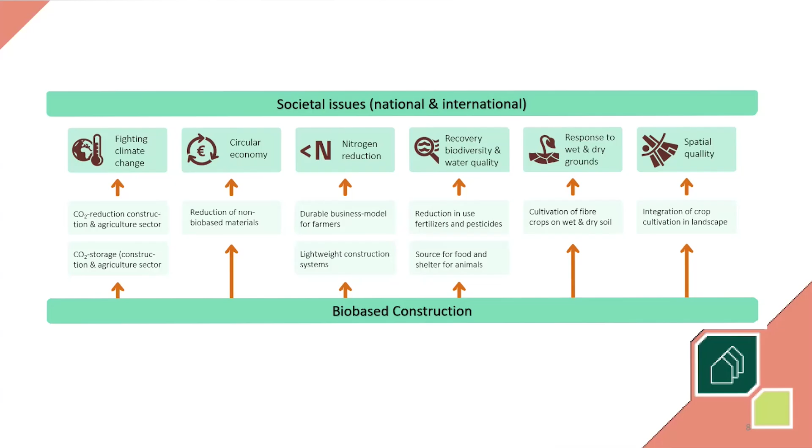because we have all kinds of layers in the Netherlands that when you reduce the groundwater average, then there's a lot of CO2 coming out. And with these crops like reed or whatever, you can raise this groundwater. And also spatial quality. So there's a lot of aspects that we can contribute to in societal issues with bio-based construction. But that's as a starter.

I was already introduced, but I'll introduce myself as well a little bit. I am an architect since 1997. I worked as an employed architect with several architecting organizations, and I made a lot of social housing. And apart from that, I also did something with utilitarian projects, mostly hospitals. I like that also very much.

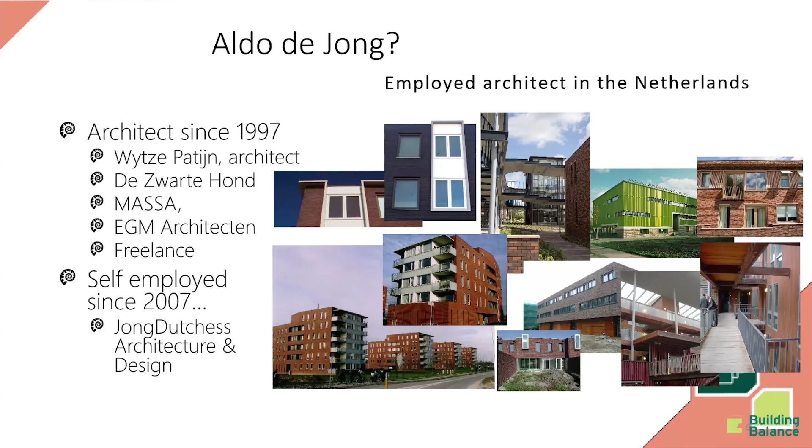So I started for myself in 2007. I thought I can do that on my own. But then in 2008, you can remember there was a big financial crisis. And in the Netherlands, 30% of all the architecture offices were gone. And I was one of them. But I lasted until 2010. And then I was employed at SBR, which is the Foundation for Building Research.

And since 2017, I am self-employed in knowledge dissemination and knowledge development for the building sector. And I'm teaching and consulting on building technology, building physics, and building regulations. And I do that for different organizations like ISSO, which is a foundation for building systems and constructions, and they also have different publications on building in general and also validated details.

I do that for BRIS, all different kinds of organizations, the Ministry of Housing. I lecture at the Brandpreventie Academy, and several certifying institutions and more. And last, I'm secretary of an advisory committee on building regulations, and we call it equally safe measures. So you can deviate from what's in the regulations, and you can do it in another way, as long as it is equally safe or good.

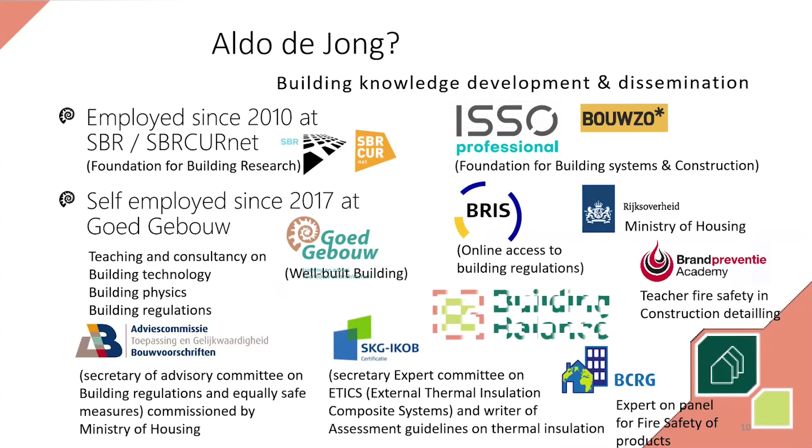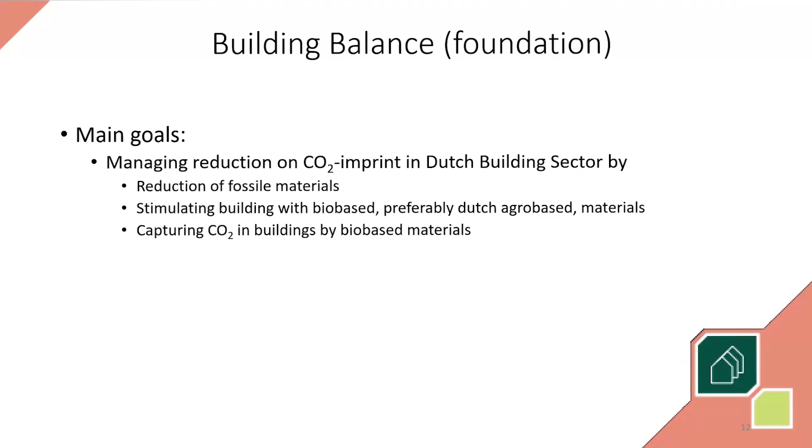And we are capturing CO2 in buildings by bio-based materials. And I use the word bio-based, but I have noticed that you use the term biogenic. Yeah, in my opinion, it's the same. I'm used to the term bio-based, so if you don't mind, I still use this term.

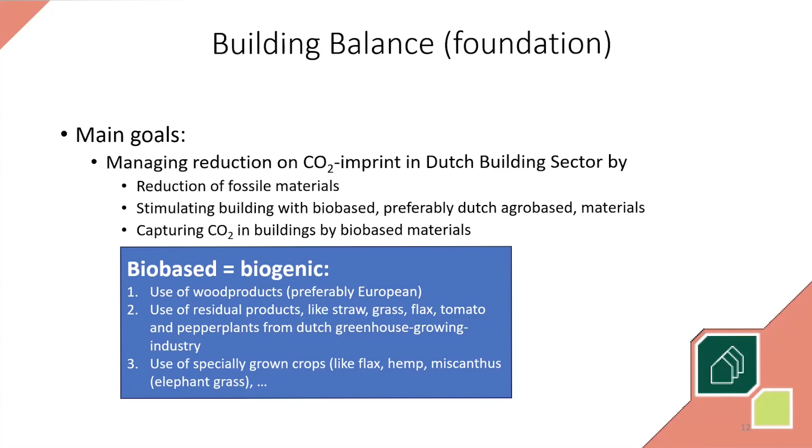Now all these goals and the whole approach is put into the national approach to bio-based construction. This was at the end of 2023. This was the start of Building Balance.

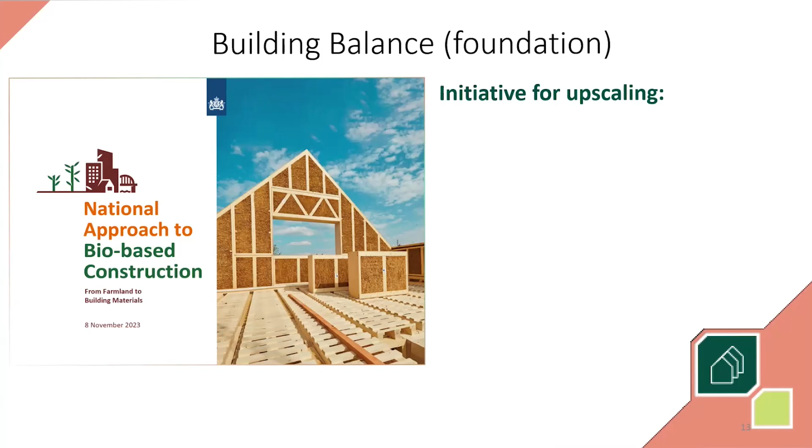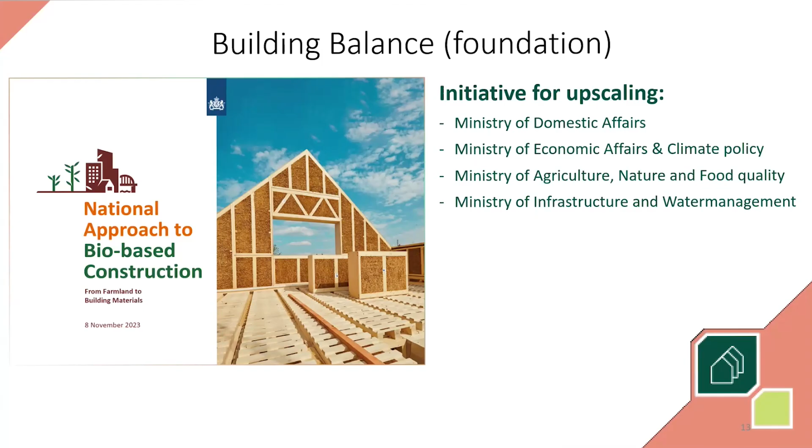We had an initiative for upscaling. That was the main goal, and it was supported financially, mostly by 4 different ministries. So the Ministry of Domestic Affairs, the Ministry of Economic Affairs and Climate Policy, the Ministry of Agriculture, Nature and Food Quality, and the Ministry of Infrastructure and Water Management. All these 4 ministries thought it was important to reduce our CO2 emission in the building industry. And therefore, Building Balance was founded, and it will also disappear again in 2030.

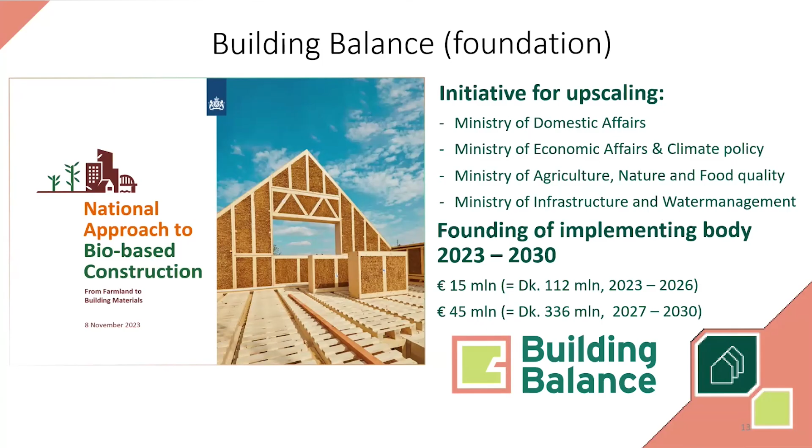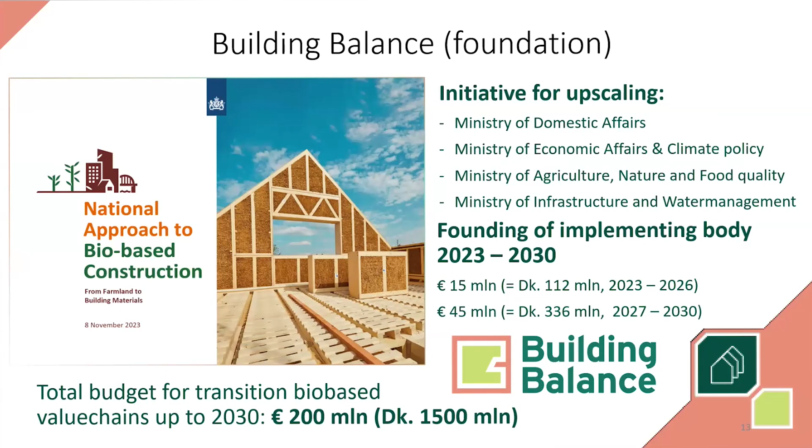And there's a lot of money involved. You see here the numbers. So that means that it's not all for Building Balance, but Building Balance can use a lot of this money. And so we can do a lot of research, and we can really do things to scale up the bio-based building. The total budget for transition of bio-based value chains up to 2030 is 200 million euros, which I calculated is about 1,500 million Danish crowns. So that's a lot of money.

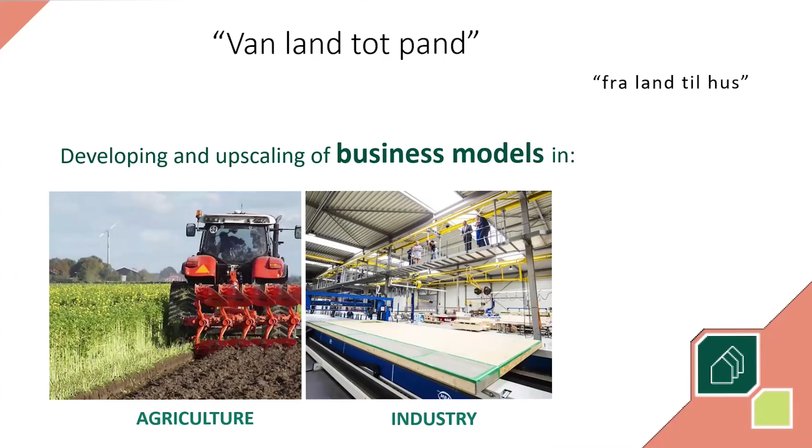How do we do that? We do that from van land tot pand. I translated that, it must be fra land til hus, or something like that. And we do that by developing and upscaling different business models. Business models in agriculture, so that's the agro-based side. In the industry, where we can process the agricultural products. But also, if it's not agricultural, but it's from wood, we can also make this industry scale up. And in the building sector.

And we are also developing and upscaling regional value chains. On the one side, we have agricultural production. On the other side, we have construction and infrastructure, and we want to bring that together. So we do that by processing all the agricultural products, make it into products and materials, and then use that for construction and infrastructure. And we try to do that all within a region, so the transporting is not so much. And what we see is also that it's nice if in your region everybody works together, has the same ambition to do it all bio-based. So we see that this works very well. These people are inspiring each other in regional value chains.

So the agricultural production, we are stimulating as Building Balance the agricultural production of crops, mostly fiber crops we use for insulation. We are stimulating factories, new factories, existing factories, for processing these fiber insulations and also for processing different kinds of fiber boards. We are stimulating product development for building and infrastructure, and we are stimulating different parties for supply and demand. So we bring together the supply and the demand.

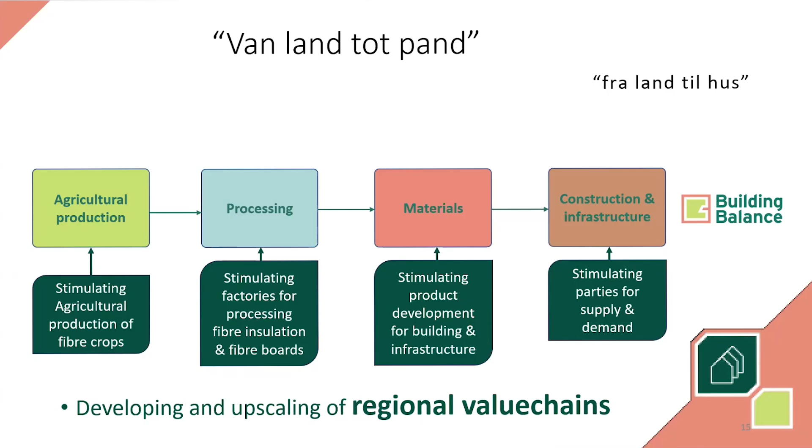You will ask, how will you do that? Well, we started with letters of intent and agreements. So we talk with people, inspire them, and then we let them sign an agreement that in the coming years, a lot of their production will be on a bio-based basis. We do that with farmers, with manufacturing companies, and also with architects, contractors, housing corporations, and property developers. They all have a certificate, and I've seen several architects where on the wall near the entrance, there's a big certificate: we are partner of Building Balance. So this works. So all this together is what Building Balance does. So it's the whole chain.

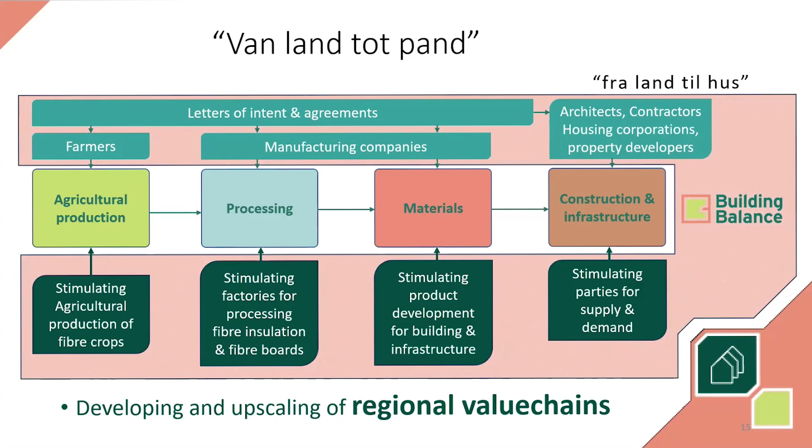Now, in these letters of intent, briefly, it says that by 2030, 30% of all your turnover or assignments will consist of bio-based products. And a product is considered bio-based if it consists of 30 mass% of renewable materials. There's also been a discussion whether it should be volume percentage, but eventually it is mass percentage. And it's lightweight, so it's really difficult sometimes to reach this 30% because stone is a lot heavier than bio-based materials. So 30% is really more than it seems.

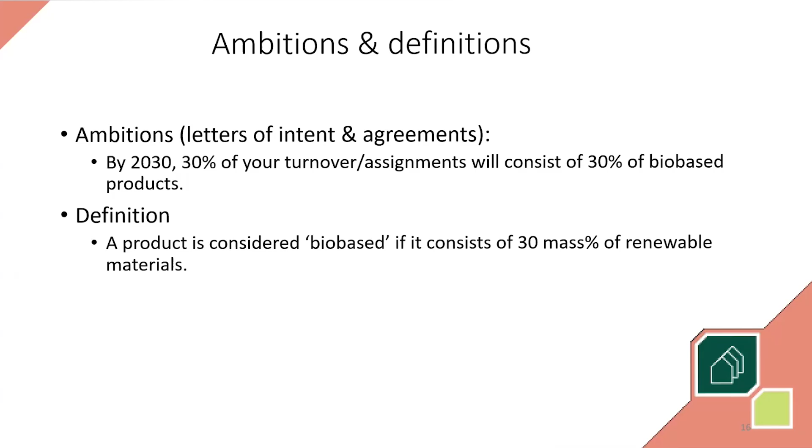Now, what do I do in this endeavor? I do a lot of things, and it's mainly focused on building the trust in the construction sector. So everybody has to trust that building with bio-based materials is a good thing, and it's not dangerous, and it's durable, sustainable, etc. But there's a lot of resistance.

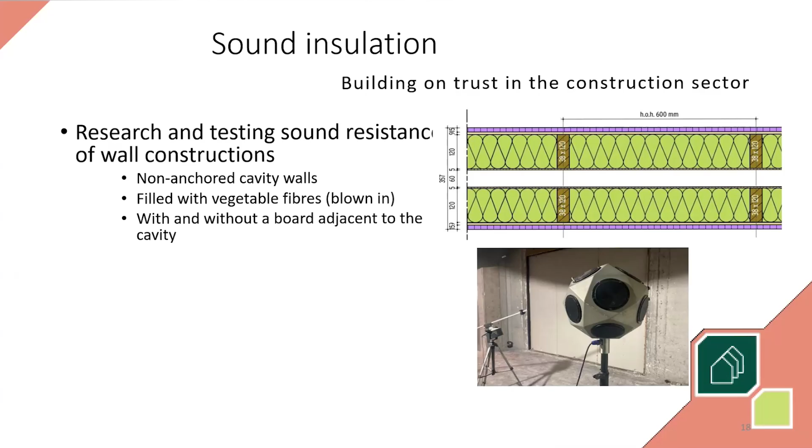So, for example, sound insulation: we research and test different walls that we never used in the Netherlands before. So we use these cavity walls between two houses, but never with blown-in vegetable fibers. It's 120 wide here, and we are used in the Netherlands to make everything as small as possible, so it's mostly 90, and here it's 120. And we have here a board on the cavity side. In the Netherlands we never use boards on the cavity side because that's not good for the sound resistance. But we did it, and we tested it, and it works if it's a flexible board.

Now, we researched, we tested a lot of these walls, but what we also did is testing different materials. And we test them on certain properties for the sound insulation, like airflow resistance, the rigidness, so how stiff is it, and we did it on different kinds of materials. And with those properties, we can design other structures that are not tested.

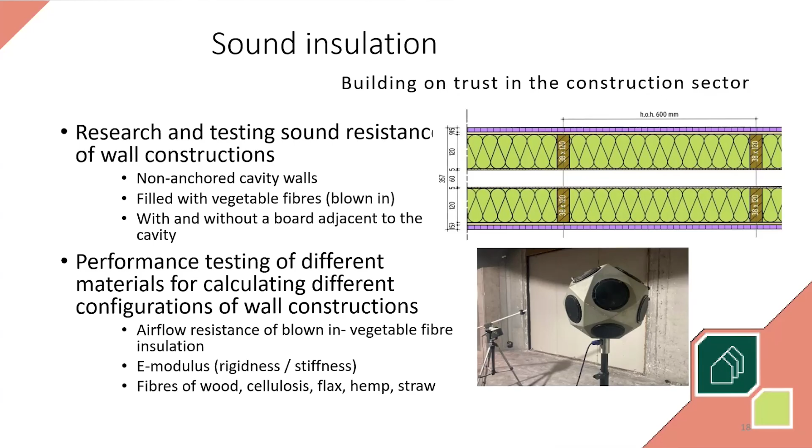So we use the test results of the tested walls in the software. We can use the other materials, and then we can take a good guess what will be the sound insulation of that wall. So then with some tests and with this small test, we can reach the sound insulation of a lot of different constructions. That was sound.

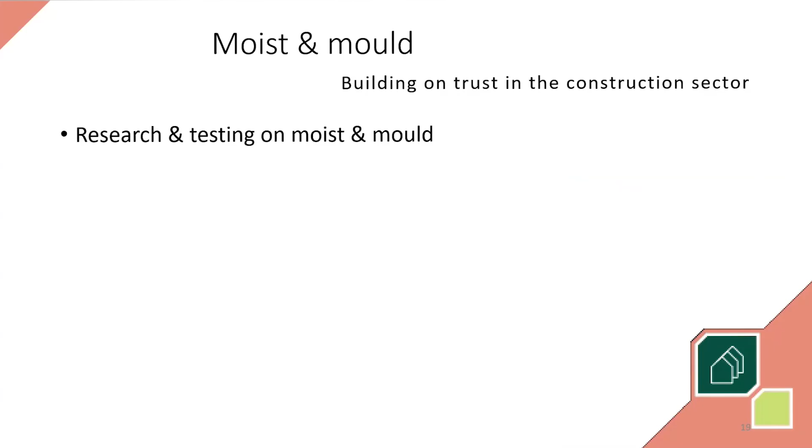Moist, oh, sorry. Moist and mold. We are also researching and testing on that, and we are determining the correlation between the relative humidity and the equilibrium moisture content. So you can understand that when you have a vegetable fiber, it's getting wet once the surrounding is wetter and wetter. So when it's 80% relative humidity, it will be more wet. But how wet can it be before it will grow mold on it? We don't know. So we're testing that.

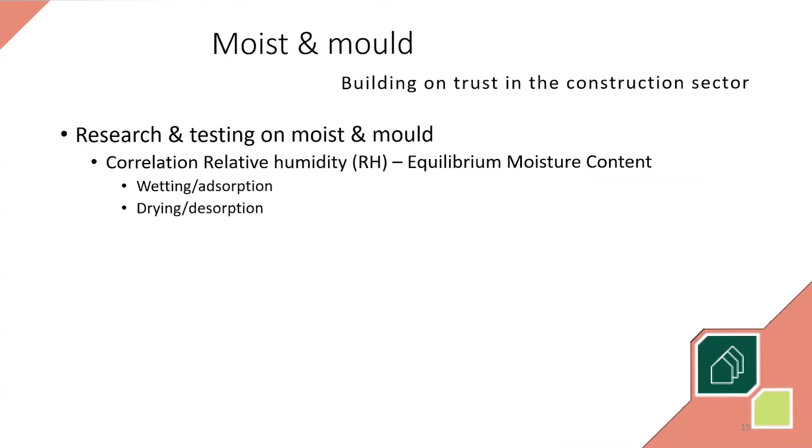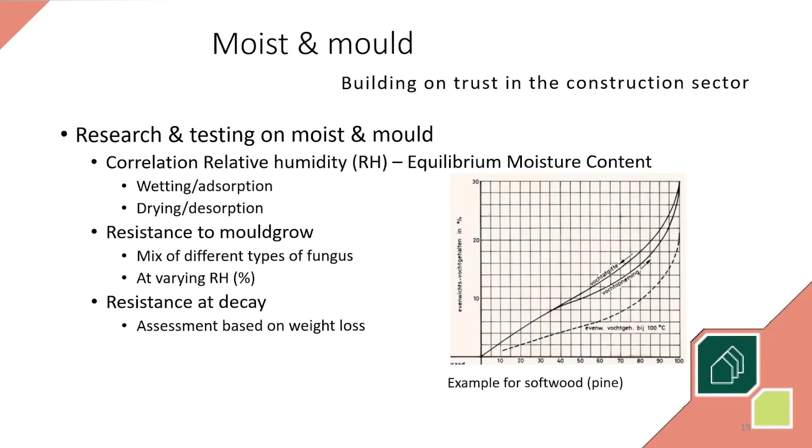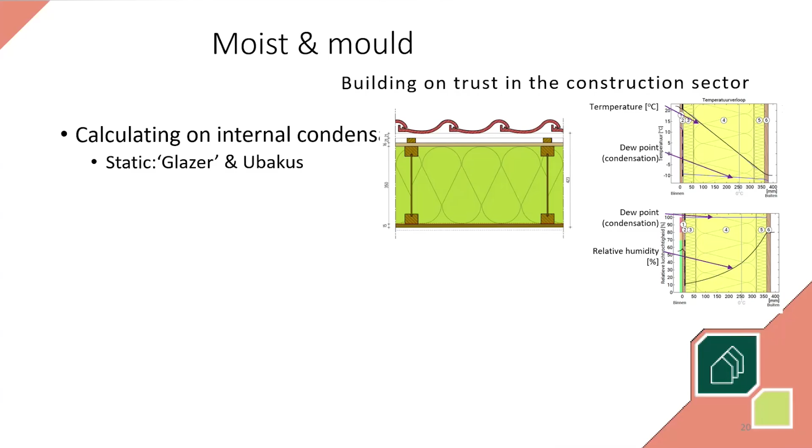And it works very good, but it only works when there's no internal condensation in the construction. But when there will be internal condensation, we think it's not so bad when it doesn't last too long, because it won't decay and there won't be mold growth. But we don't really know. And how long can it be wet before it dries? Then we have to go to a dynamic calculation, and we do that with WUFI Pro.

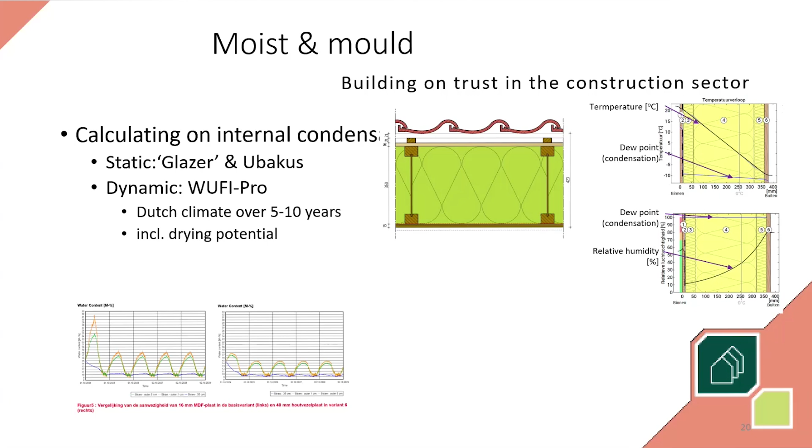WUFI is a software package of Fraunhofer Institute in Germany, and it's really the top of the bill package. And then you do it dynamically, so you take, in our case, the Dutch climate over 5 to 10 years, and you calculate on what weather in those past 10 years, for example, there will be internal condensation, and when it can dry out, and how long this wetting takes. Now that's on moist and mold.

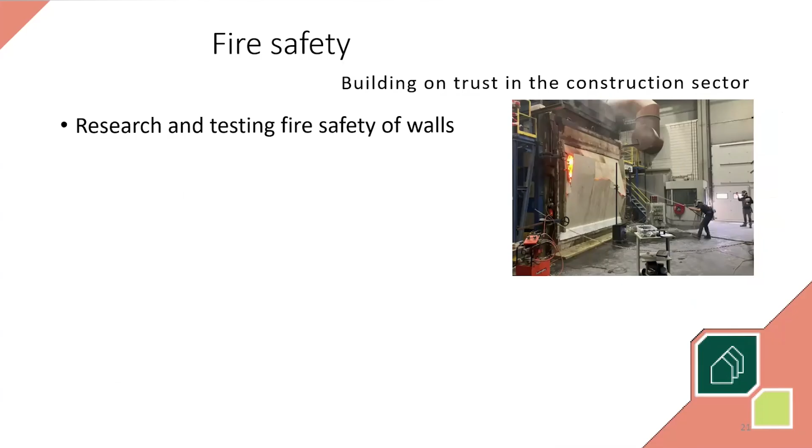And then fire safety. We're also doing a lot of research. We have done a lot of research. This is really finished for a great deal. Research and testing of fire safety of walls. I saw that you in Denmark do large-scale tests. This is the largest we can do here. So we are now upscaling in the Netherlands. We have 2 fire laboratories in the Netherlands. We are trying to get it bigger, but it's not so easy because the roof is too low. Yeah, I can't help it.

So we're researching all kinds of walls. This is an example of a load-bearing wall, and you see it in the moment that it fails. And we are also interpreting and interpolating the test results of those fire safety tests. And we do that with the help of some new documents, which are very interesting, namely the new design Eurocode 5. So that's the Eurocode on wood structures. And they have new definitions in it, like the charring time and the failure time of the fire protection system.

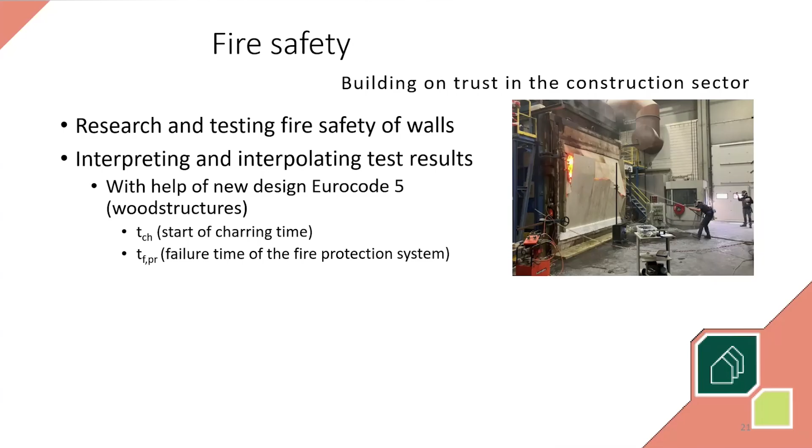The charring time is the time, after the ignition of the fire, when a vegetable fiber or an organic material behind a fireboard, like a gypsum board, for example, will start to char. And when you know that for different materials behind a protection layer, then you can switch all these materials into different constructions, and you can take a good guess how fire resistant that will be. There's also the failure time of the protection layer, so for the gypsum board, for example.

And we also have the protection level classification. That's also new, and here we have done tests on that. And the main thing of that is that the vegetable fiber insulation is in the same class, according to this new Eurocode, as glass wool. And we build a lot with glass wool. So how is this possible?

Well, glass melts at 700 degrees. A real fire, a developed fire, is at least 800 degrees. So the glass wool will be gone, as will the vegetable fiber. But we have a lot of constructions with glass wool, so that's something we can relate to. So we use this PL2 test also to switch between glass wool and vegetable fibers.

And we also have help of the newly introduced fire protection ability. I don't know if you have heard of that. It's all very technical, of course, but I think it's very important, because if you are going to use bio-based materials, then you have to know more and more of these properties that are valid. Because when you build with stone, nothing happens. When you build with stone wool, it's no problem. But now we build with materials that can burn. So you have to know more about these definitions.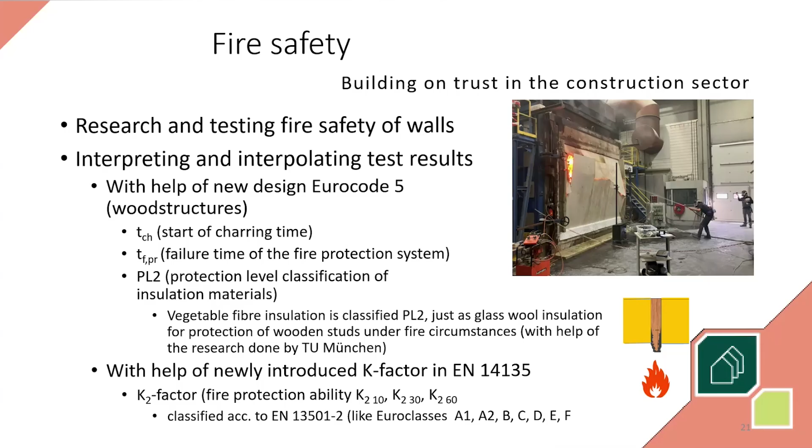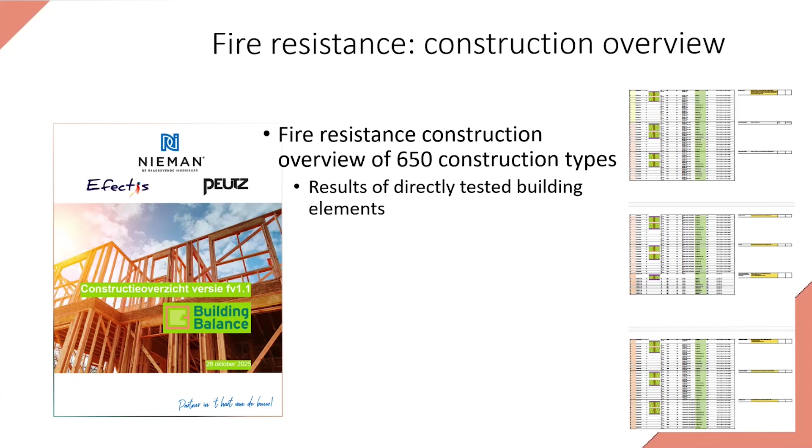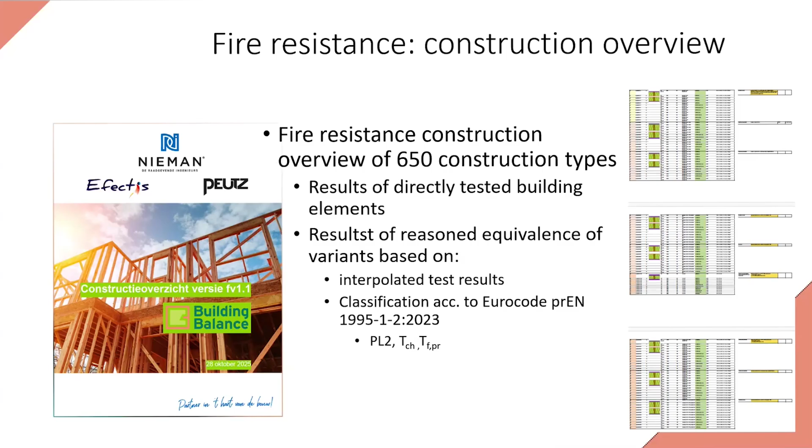So with all the tests and with these new definitions, we made a construction overview with 650 construction types. It was a real hell of a job. And this construction overview is all free. You can find it on nkbb.org. You find the results of the tests itself, and also the results of the equivalence of different variants based on the interpolated test results and on the classification according to the Eurocode with these definitions. It's too difficult to do this now in half an hour, but it's really mind-blowing.

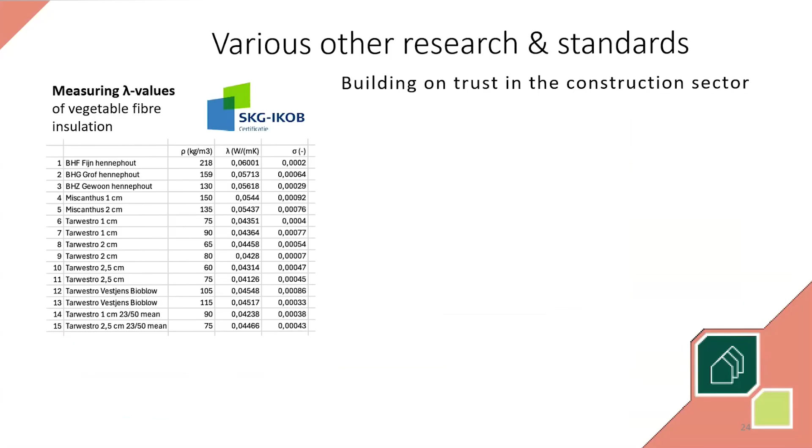We also do various other research. Just in short, we are measuring all kinds of lambda values for the insulation of vegetable fibers, because we had to use, we call it forfaitaire values, and they were not good. So we tried to certify all different kinds of vegetable fibers and their lambda values. We also did research on phase shift.

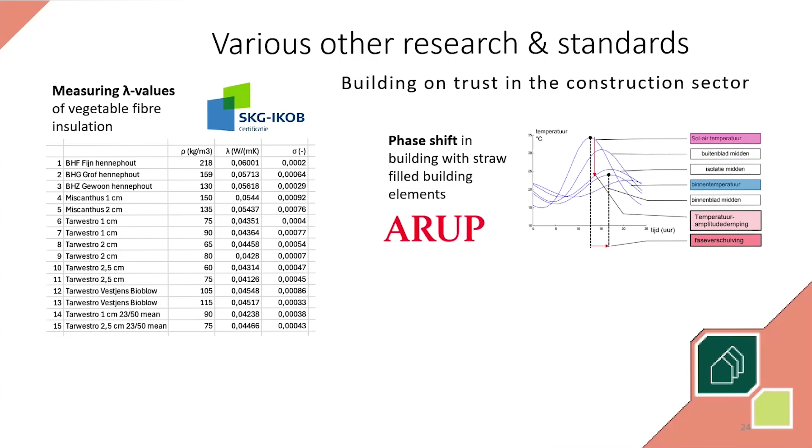Phase shift means that when the sun is shining and it's getting hot, then inside it's still cool; it takes some time before it's hot inside. You can put hours on how much time it takes. With stone, it's heavy, it takes a lot of time, and with light structures like bio-based materials, it's not that much as with stone. But it has a positive influence on how much energy you use.

And from end of May, the phase shift, based on the research we did, is now also in the Dutch building regulations. So we can profit now from the phase shift in our energy calculations. We also did research on plague animals in bio-based buildings. And the conclusion was that there's no difference between a building with glass wool and a bio-based building, because in glass wool there's no nutrition, and in the bio-based fiber there's also no nutrition, so there's no difference.

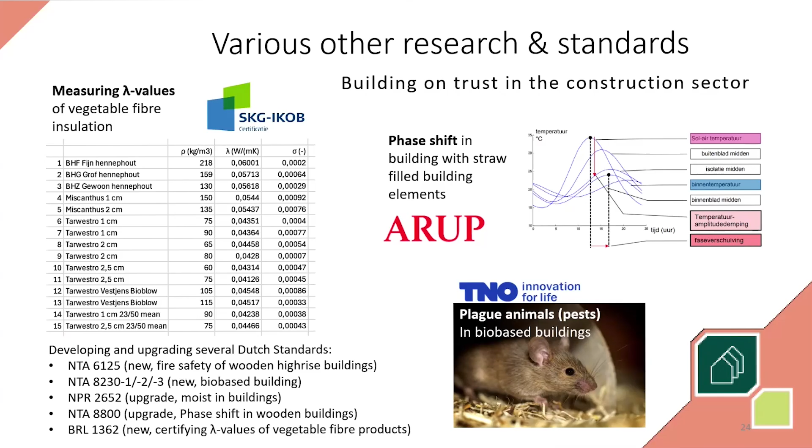And we're also developing several new standards for the fire safety of wooden high-rise buildings and for bio-based building in general. And we're also upgrading different standards, like moisture in buildings, the phase shift I mentioned, and also for certifying lambda values. And even more, but this is a nice overview.

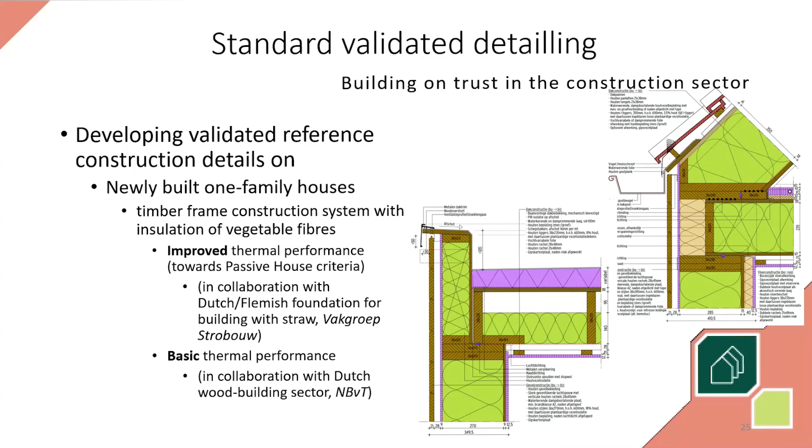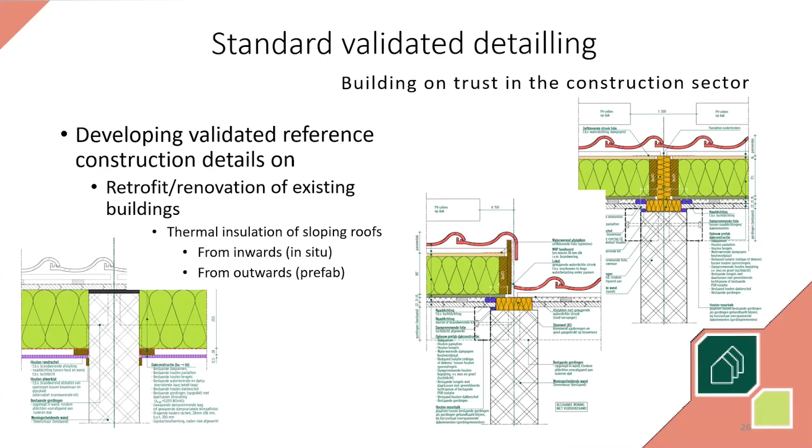Then first we remove the tiles and then put the prefab element on top of that. This is when one home is insulated and the other is not. And we are also developing details on insulating walls from the inside of existing buildings, here you see, and also of ground floors, which are not insulated mostly, and we want to insulate it, in this case, detail from inside.

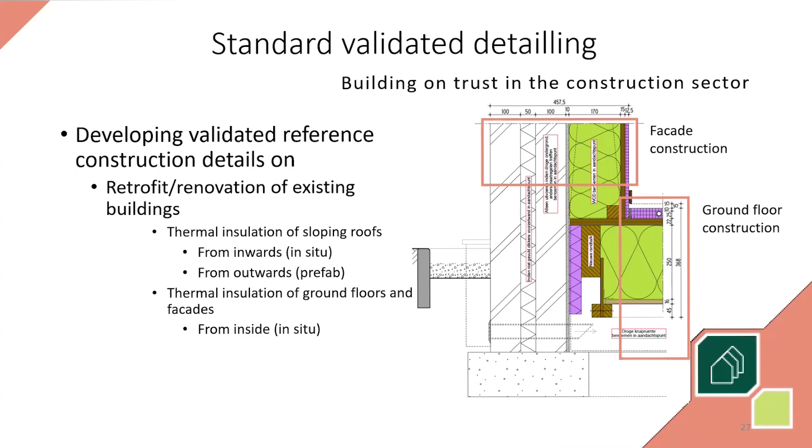But a detail is a connection between different construction elements. So what we do is we define a facade construction and we define a ground floor construction, and then we make the connection. So in this definition of the construction elements, on the right you see the ground floor. We define the RC value. We also define the sound resistance, now not for the ground floor but for the wall, and also the sound performances between rooms, like the DnT,A,k, etc. And also the fire resistance.

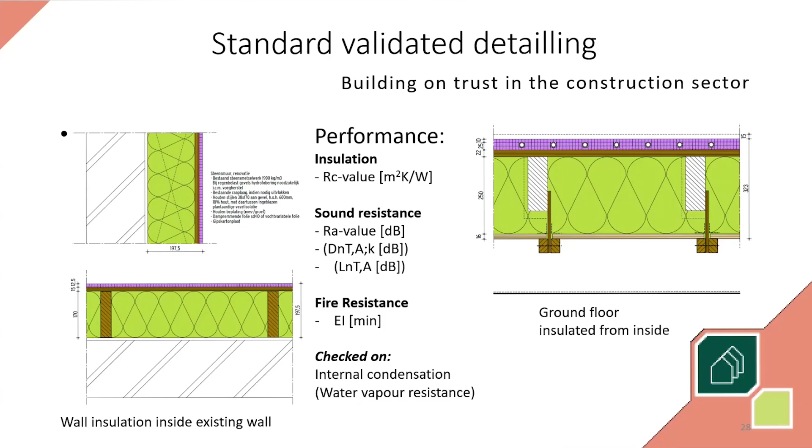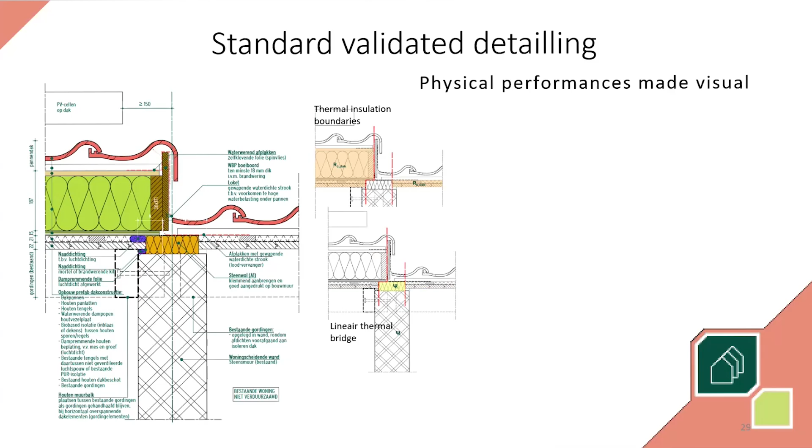And then when we make this connection, when we make a detail, we want that you can use this detail in your own project details, and that's a difficult thing. So what we do is we make all the physical properties of a detail visual. So here you see visually made the thermal insulation and the boundaries of the thermal insulation of a rooftop. And that is important because in between these rooftops you have the linear thermal bridge, and we also have to calculate that for the newly built building. So that's the energy loss through a connection.

We also do that for the water tightness. So how does this water tightness work? And when you have your own project detail, then you can look how this is built up. And if you build this up in your own project detail, then it will work the same way. Also for vapor resistance, air tightness, sound insulation, and for fire resistance. Just for fire resistance, all the trajectories of the fire spread through the connection are here worked out and are evaluated to see that the fire will not spread within 60 minutes towards the neighbor.

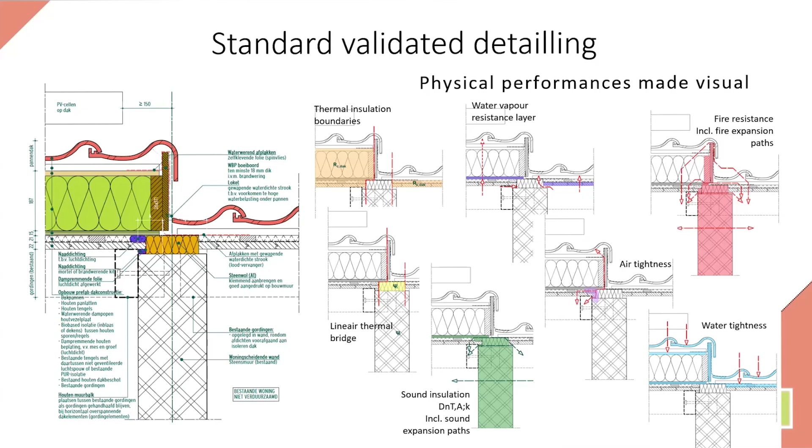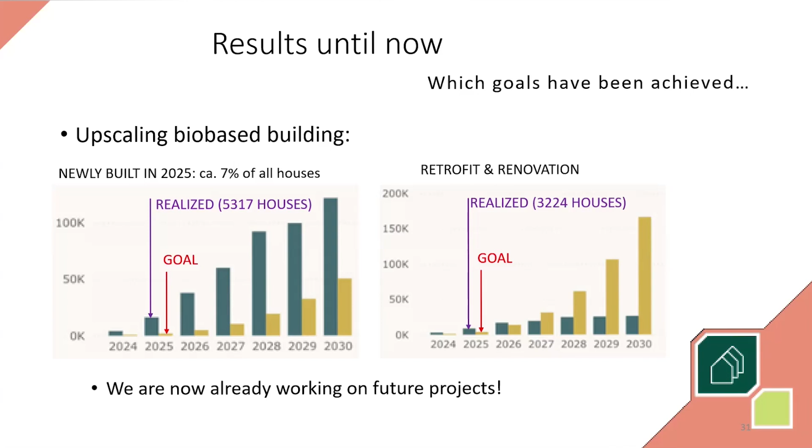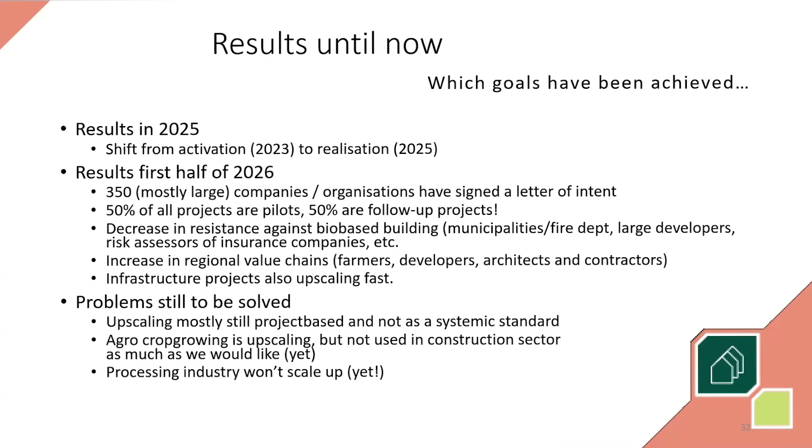The problems we still have is that upscaling is always project-based, and it's not systematically in the companies and the standards. And the agro crop growing is upscaling. That's going well, but it's not always used in the construction sector because the chain is not reacting as it should yet. And the processing industry won't scale up yet. So that's it. Thank you for your attention.